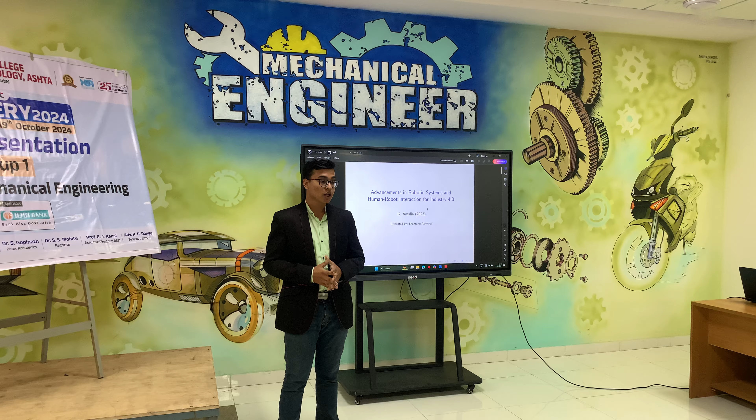From Dr. J.J. Mundam College of Engineering, today we are going to discuss a research paper on advancements in robotic systems and human-robot interaction for Industry 4.0. This research paper was originally published by K. Amalia, a professor from Ukraine, in the year 2023. So now, let's start.

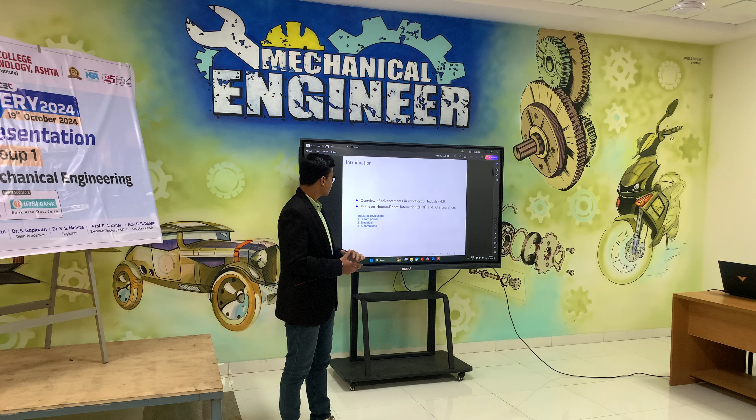First of all, let's see about Industry 4.0. As we all know, there have been 4 industrial revolutions till now. The first one was steam power, second was electrical, third one automation. In Industry 4.0 currently we are approaching human-robot interaction and AI integration in machines. As we advance towards the future, we have the need for human-robot interaction, that humans should now work with robots, because the advancements have come so far in this industrial field that humans now need to work with robots, and also we need to integrate AI in the robots.

Now let us dive more into this topic.

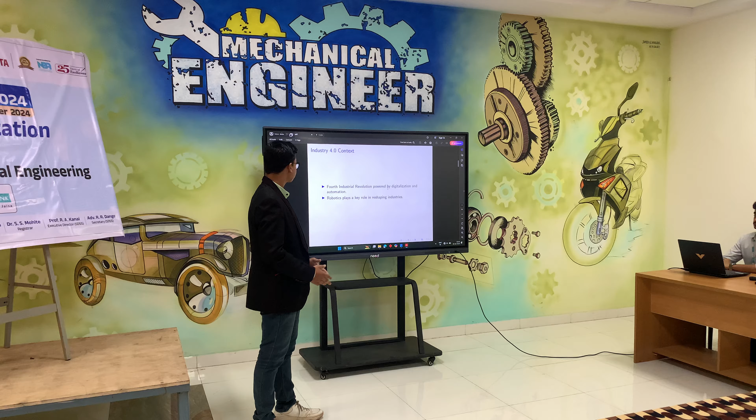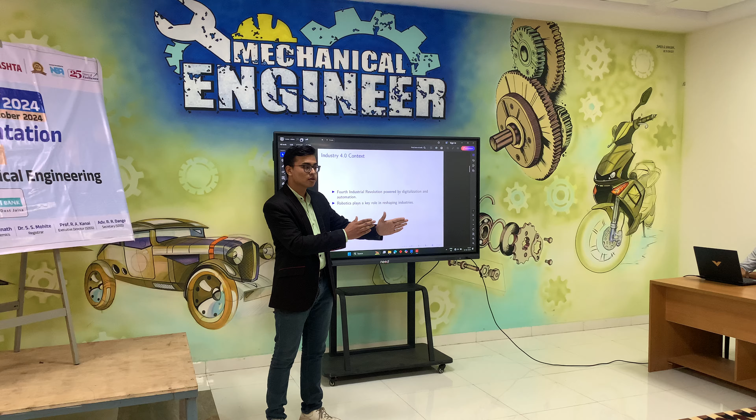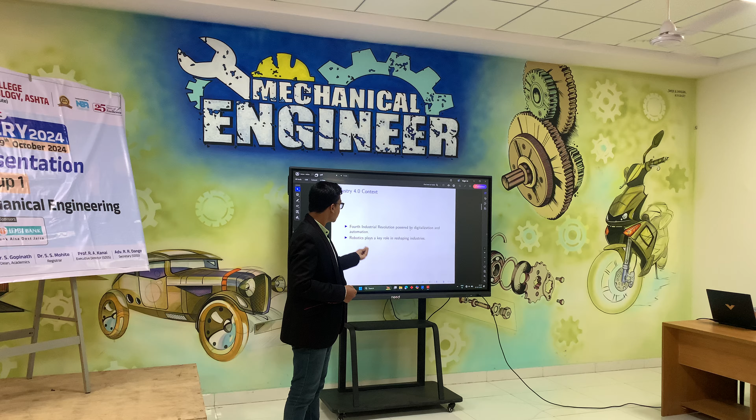The 4th industrial revolution was powered by digitalization and automation. As we all know, the assembly line of a vehicle - how it was working in previous days - the person was standing and fitting all the nuts and bolts and making a vehicle. But now the scenario has changed. Now we have machines and automation that work independently without humans to make a vehicle. A vehicle can now be made from the assembly line within a couple of minutes or even less. So robotics are playing a key role in reshaping the industries, because of the human-robot interaction.

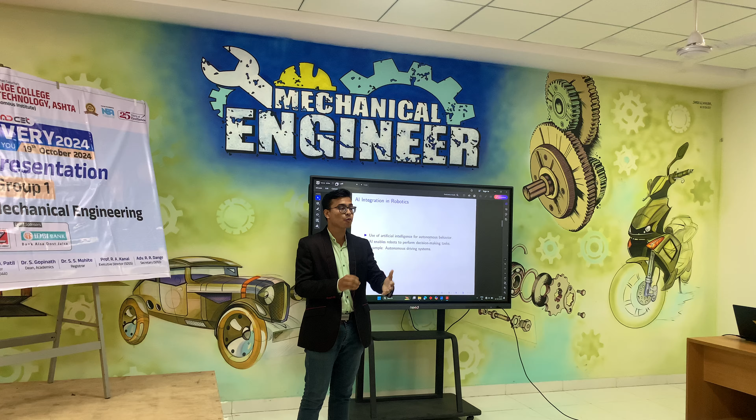Now, for the autonomous behavior, the robot should work autonomously without the bothering or control of humans. We are using artificial intelligence for that purpose. Artificial intelligence is booming in the current world, and we have to integrate the same in robotics for the improvement of our industries and also for more productivity.

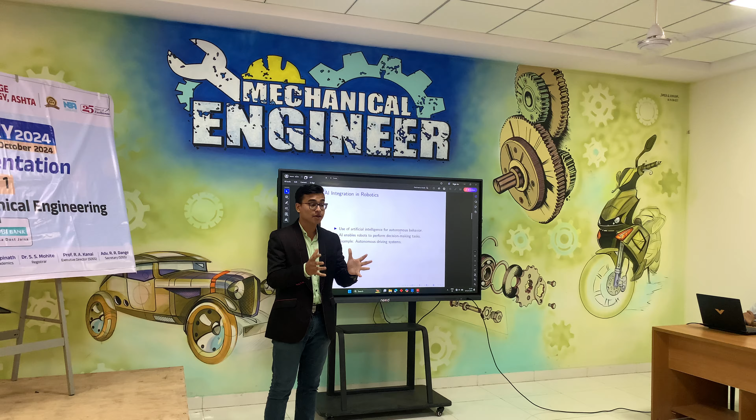What does AI enable? AI enables robots to perform decision-making tasks, from recognizing an image to performing a task, the robots are very necessary. And to do that, we need AI. The AI drives the robot to do certain tasks and increase our productivity and increase our manufacturing rate.

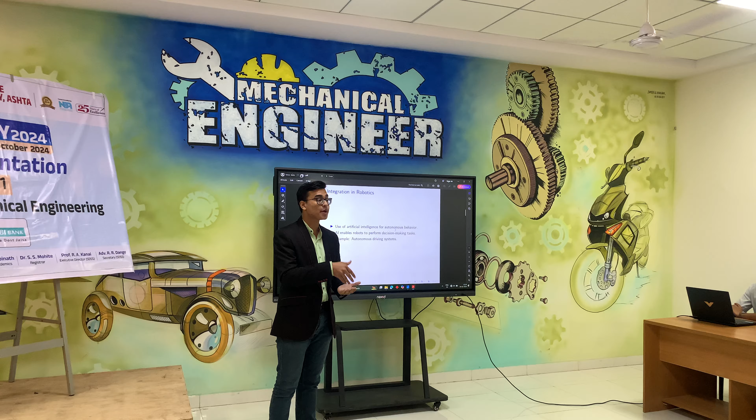Now let's discuss more about the cobots. What are cobots? Now, the transition from isolated robots to cobots - what is a cobot? A cobot is a type of robot which works collaboratively with humans.

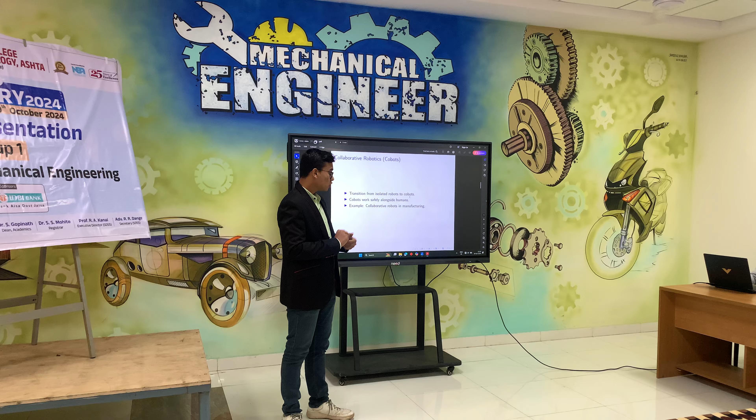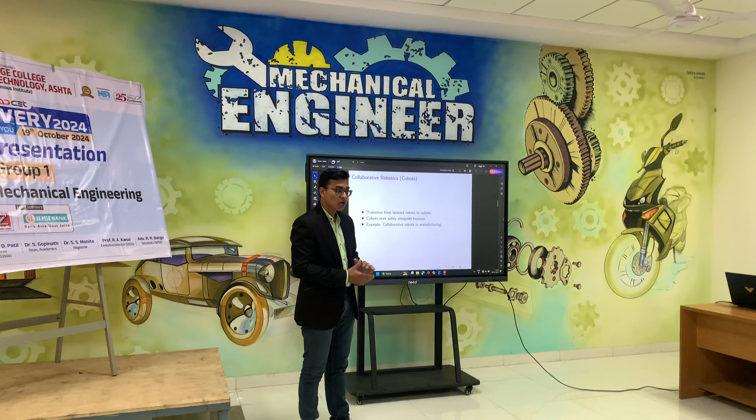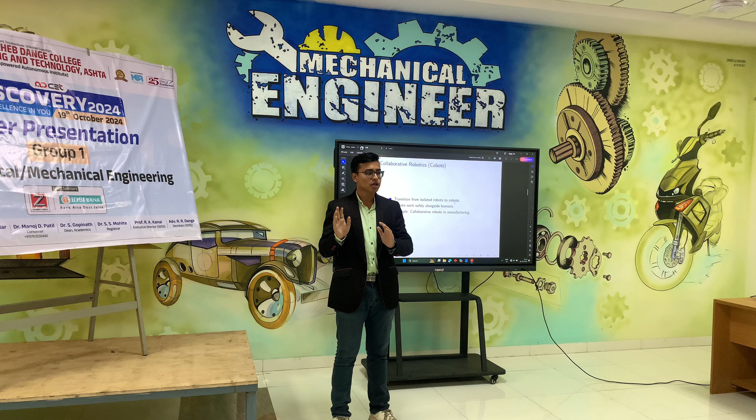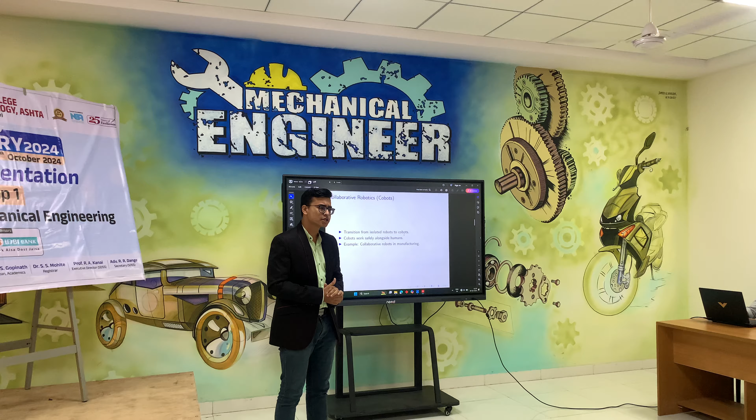Now, in workers at factories, we are reducing the number of workers. Why? Because the robots are working in collaboration with humans. And what are the robots called which work collaboratively with humans? They are known as cobots. What is the advantage of a cobot? A cobot can work very safely alongside humans. Cobots are very safe, very reliable, to increase our productivity and make tasks perform very quickly.

Now, as I have taken the example, the collaborative robots work in manufacturing, in food industry processes, vehicle manufacturing, or any kind of mechanical manufacturing - cobots are currently working in these fields. Next slide.

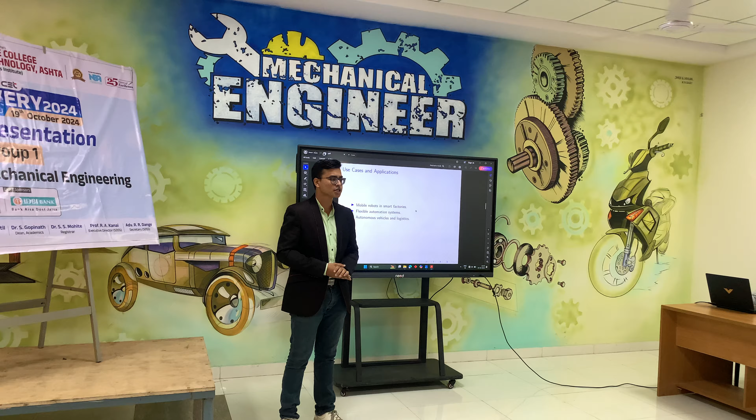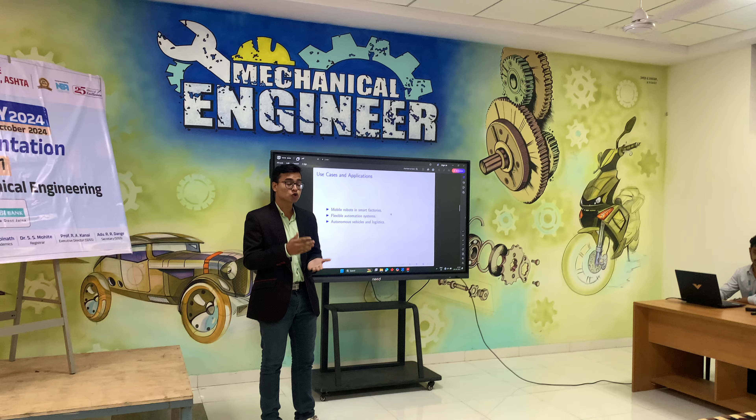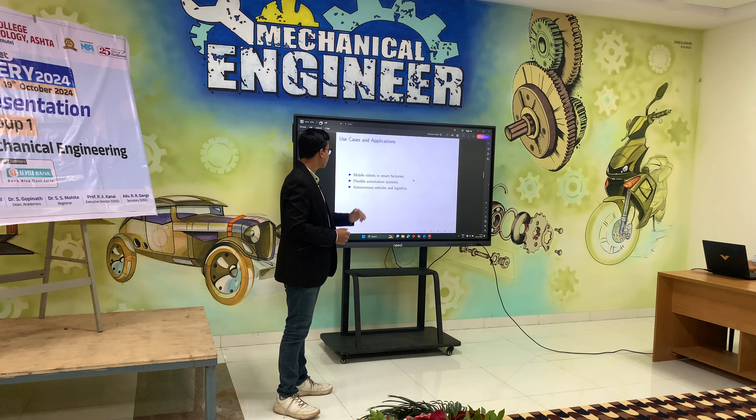As we have seen many videos on YouTube of very famous tech burners showing the view of the smartphone industry, we come to a conclusion that robots are performing very well in manufacturing smartphones. Nowadays, we don't need humans to assemble all those micro parts. The robots are doing it very effectively and precisely, so there are very few errors, and we are getting closer to perfection. The mobile devices we use have greatly enhanced designs because of the integration of AI and robotic collaboration in industries. Also, autonomous vehicles and logistics are very collaborative.

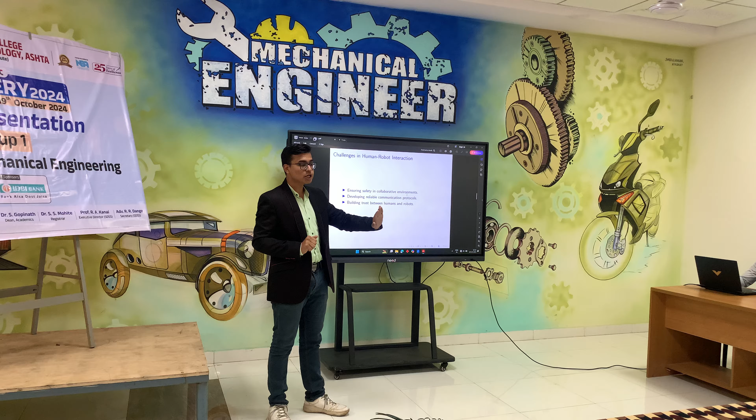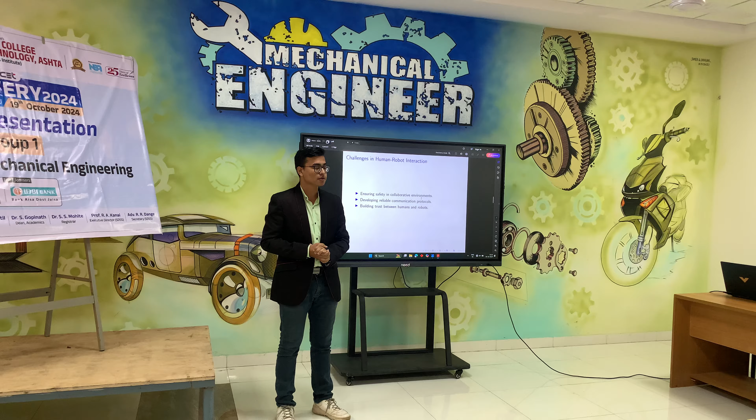We have to ensure safety in collaborative environments where humans and robots work together. If the robots go uncontrolled, we have to be able to control it with certain programs that we should make earlier to ensure safety between robots and humans.

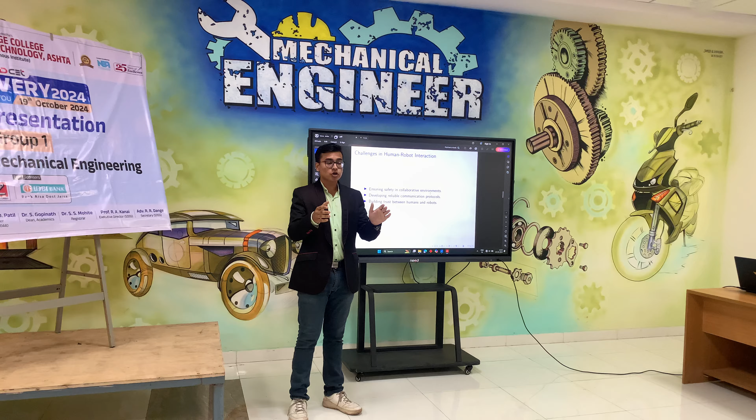There should also be reliable communication protocols. Since a robot is a non-living thing that works completely on programs made by humans, it should be reliable and should not perform tasks which are not given to it. So we should make reliable communication between humans and robots to ensure safety and reliability for both the employees and the robots working together to increase productivity.

Safety in robotic systems is very important. HRI, that is human robotic interaction - safety in this human-robot interaction is very important.

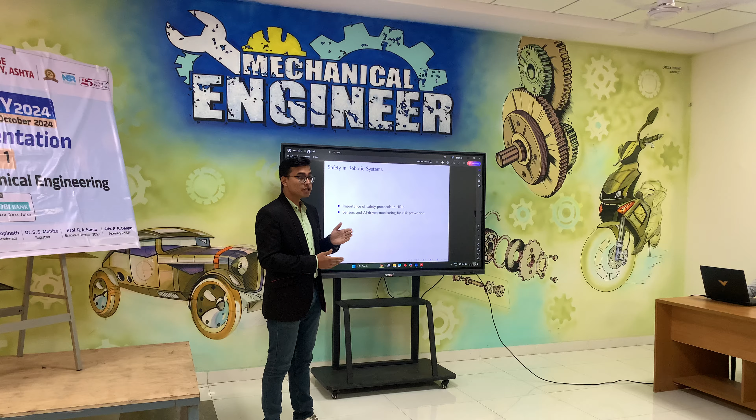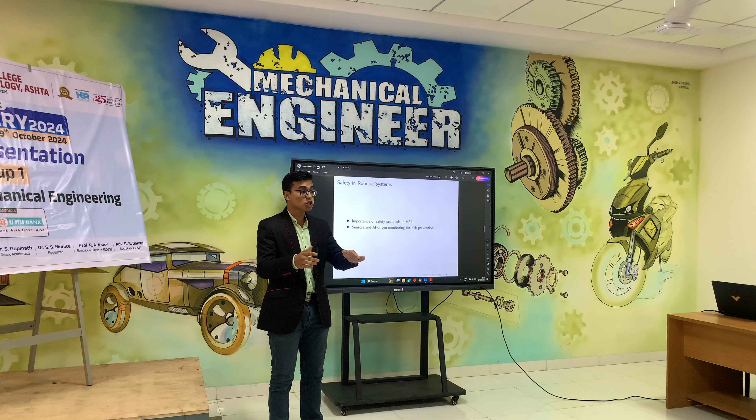There are some standard protocols ahead of us that we need to follow if we are integrating AI in robotics and doing automation. We need to follow these safety protocols. There are also sensors and AI-driven monitoring systems; there should be no errors and they should not malfunction, since that can pose risks. We have to reduce that risk and follow safety protocols to ensure a collaborative environment between humans and robots.

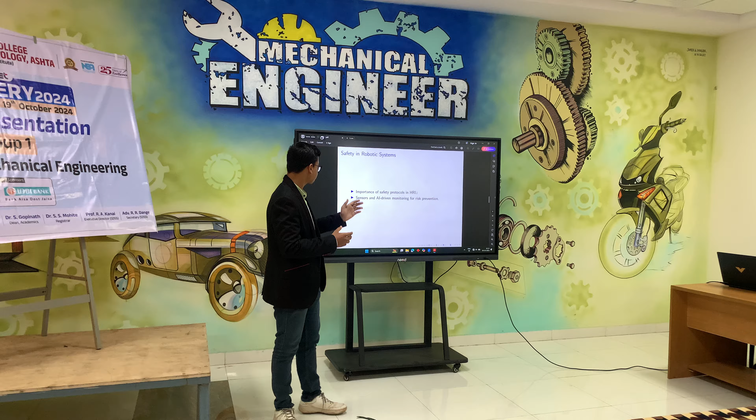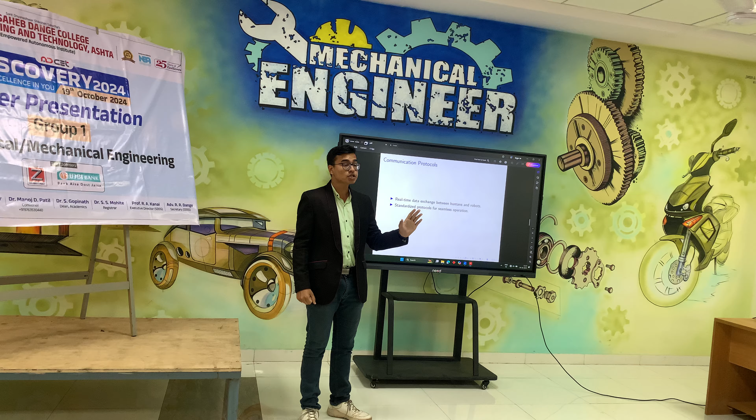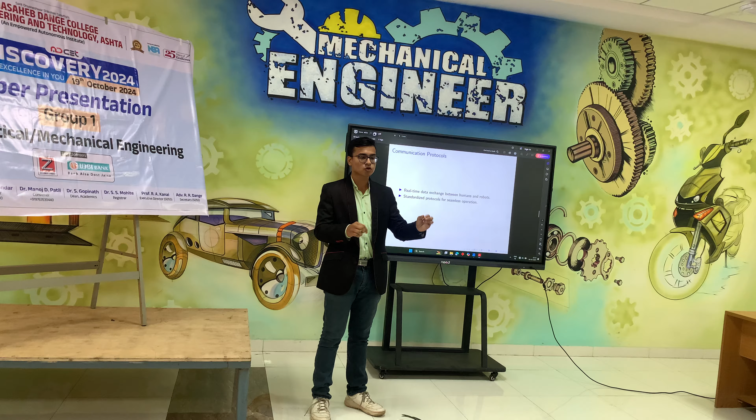There should also be communication protocols for real-time data exchange between humans and robots. As we know, 5G-driven technology is very important. In the USA, drones and smart robots work to search for lost persons or particular objects and to deliver packages, and they work very quickly because of 5G. 5G internet connectivity gives a great advantage for robots to work in a specific and quick manner. 5G data transfer speeds are very high, up to 4 to 5 Gbps, and this speed helps increase the productivity and performance of the robots we use.

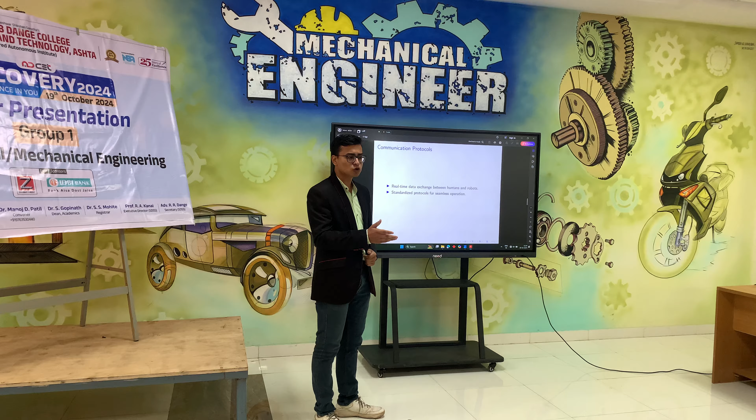The robotic systems in the US and in other countries, as we know from some examples, are great examples for us to prove this.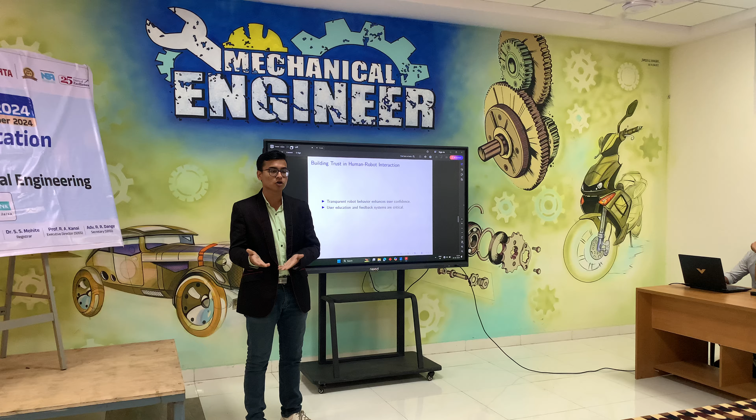Transparent robot behaviors enhance user confidence. User education and feedback systems are critical. We have to train our personnel and employees to teach them how human-robot collaboration works and how this environment is created in our industry, to ensure peaceful and smooth process execution.